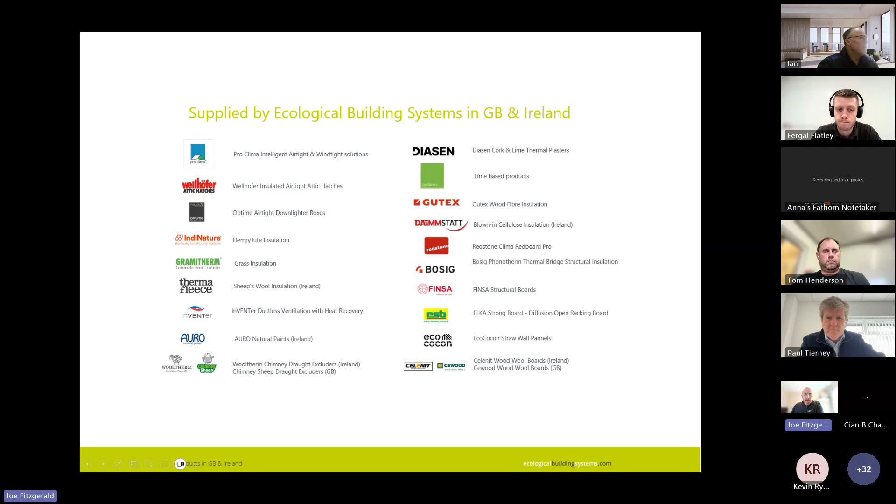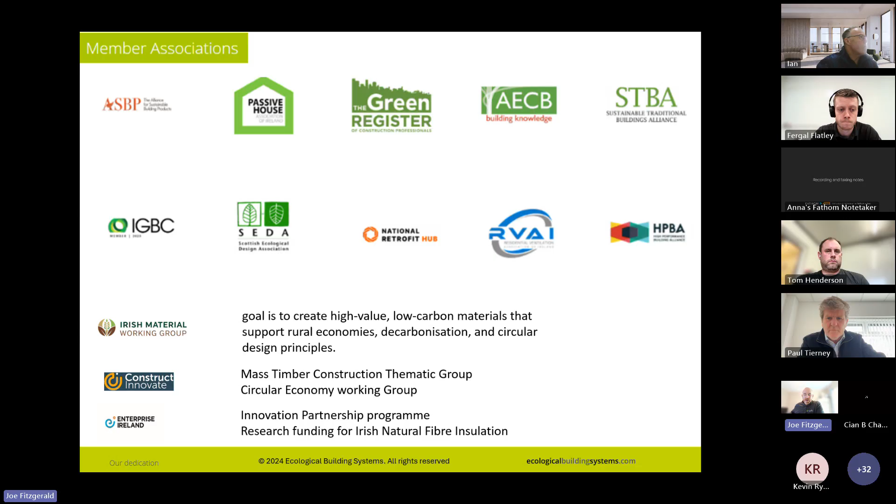Climate action is really driving the need for a change, and there's a growing need, as I said at the beginning, to address embodied carbon and other associated emissions in the built environment. So with that in mind, we have to think about what we're building from. And Ireland's climate action plan that I showed a moment ago is setting an ambitious target for us to achieve a 51% reduction in overall greenhouse gas emissions by 2030 and sets out a path to reach low carbon emissions by 2050. But timber is recognised as a key material that can help us meet these challenges.

So if we're going to build from timber, then it's also important that the insulations we use and the technologies that we're promoting are consistent with those types of principles. So architects and designers are going to more and more be required to specify low carbon construction methods and even low carbon cement material as far as practical moving forward. So you're seeing big shifts in the industry and a lot of changes in this area.

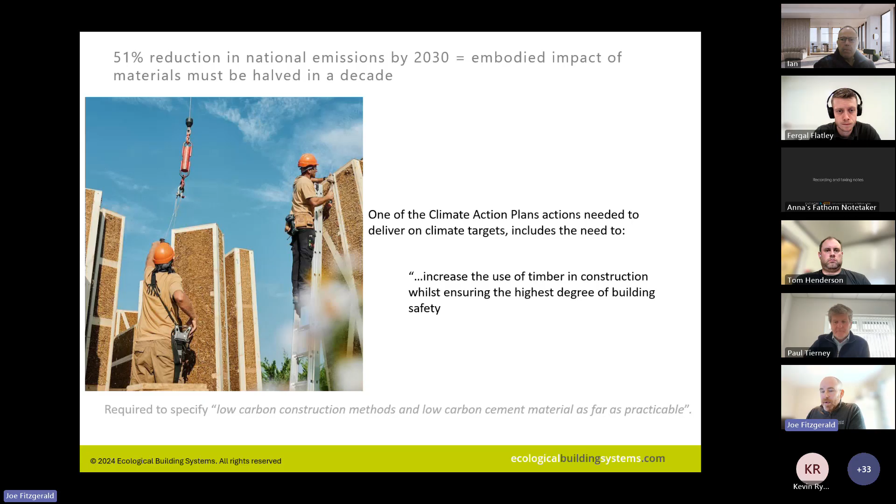We're also trying to move towards a more circular economy where we're reducing waste, and instead we're trying to promote the reuse of materials. But a big problem we have, if you take these figures taken directly from the IGBC, the Irish Green Building Council, they published a Circular Ireland roadmap last year, and this is one of the key statistics in the report, which you can download: 97% of materials flowing through the Irish economy are from virgin sources. So if that's the case, then we're not doing very well in terms of circularity or reusing materials. So if we have such a heavy amount of virgin material moving through the Irish economy, we have to carefully select the material that we're using in construction.

So we can do that by using EPDs, or environmental product declarations. It helps us to look at this virgin material. It helps us to determine what, if any, impact the material may have on our buildings. So most manufacturers now declare environmental performance of building products in this way. And as I said, they're not the silver bullet, but they can be used as a frame of reference for building life cycle assessments. Here's just a quick example for you.

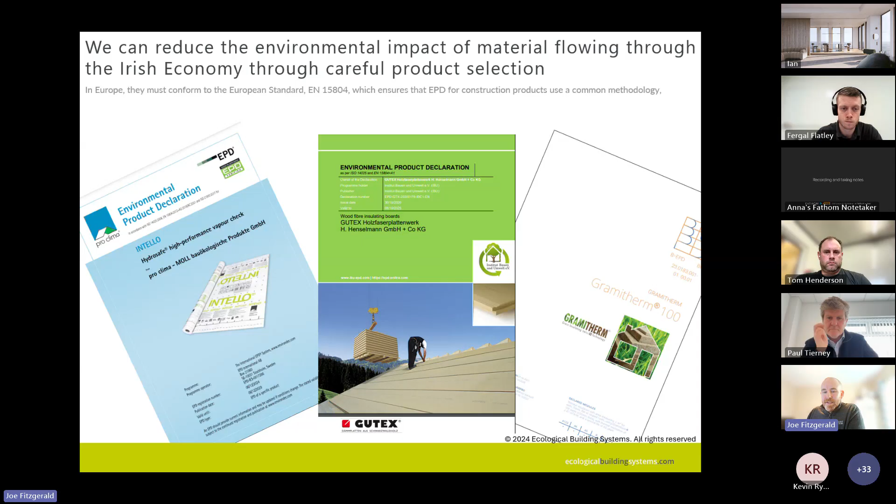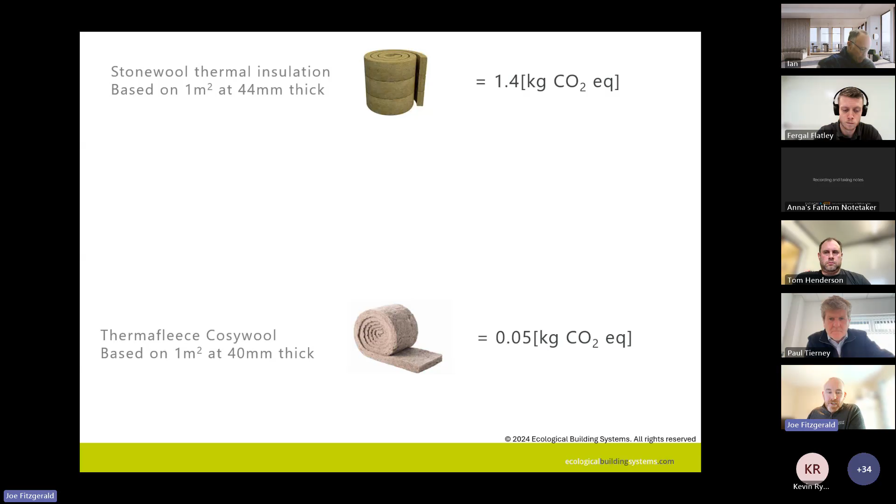If you take the EPDs for two products on the market, Thermafleece Cosywool supplied by Ecological Building Systems, compared with conventional stone wool thermal insulation that would give you a similar U value, the Cosywool, just by comparison of global warming potential alone, performs about 28 times better. So just on that basis alone, if you get the same U value but it has a lot less environmental impact, there's great cause there to be potentially using something that can benefit not only the agricultural sector, but also the environment, as well as building performance.

So it's not just about the materials you supply, but in Ecological Building Systems as well, we also try to promote low carbon construction techniques and technologies. EcoCocon, for example, would be a recent strategic partnership to try and promote low carbon construction at scale.

So if you take the construction technology in mind here, EcoCocon, which is a load-bearing twin-stud timber frame, it's just filled with compacted straw. It's not treated, it's just pressed really tightly. Then it goes into a big machine, it's lifted in by robots, and it gets a haircut. It gets a very nice, precise trim where you end up with a very consistent panel, very consistent U values, very consistent performance. It's 89% straw, 9% timber approximately, and the rest is about 2% fixings.

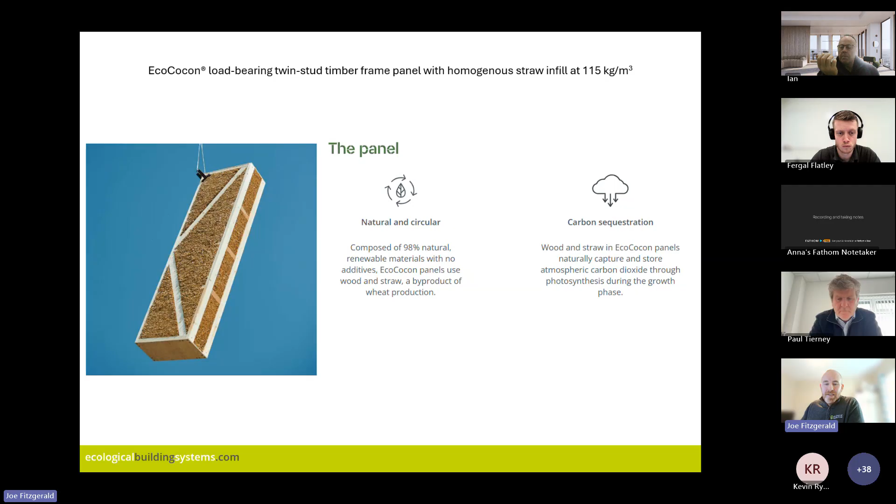So wood and straw in these panels naturally capture and store atmospheric carbon through photosynthesis during the growth phase. And a lot of insulations do this as well, things like wood fibre, hemp, jute, etc. You get a lot of carbon sequestering going on. So when you combine a low carbon construction technique like this with a low carbon insulation material, you get many of the advantages that we're trying to achieve for Ireland's Climate Action Plan.

You can take the same technology and apply it to a roof. Every building in the world has a timber frame sitting on top of it. So the roofs can be naturally insulated, enhancing the performance of the wooden technology that's already in place. Or you can go for something more ready-made, like the EcoCocon straw wall panel system, which comes with its insulation in it.

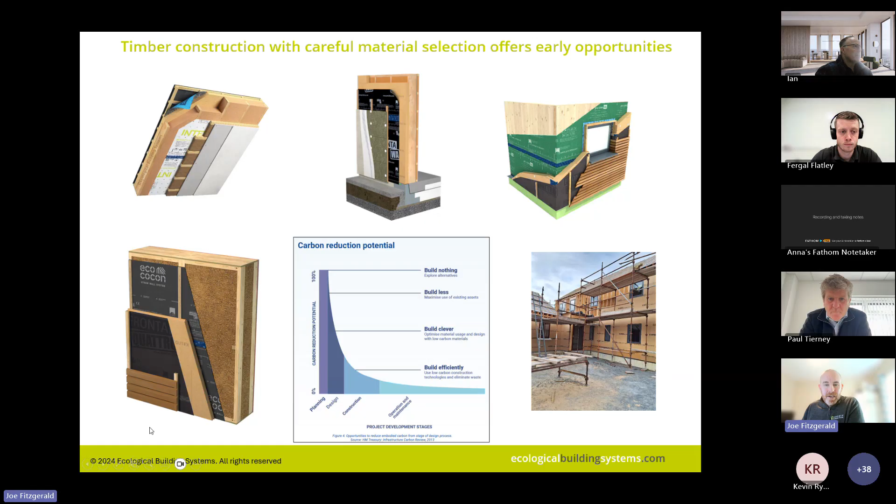And building cleverly is where we can make good design choices to affect carbon in the atmosphere, because the built environment is associated with about 39% of global emissions when it comes to climate pollution. So really, by carefully selecting what we build from, we have an opportunity to reduce this impact. So natural fibre insulation goes a long way to doing this. It doesn't need to be overly complicated.

Natural fibre insulations are made from organic materials like wood fibre, hemp, wool. The fibres are then mechanically processed. They're not chemically altered; they keep them as natural as possible. The amount of processing really just varies by the different types, as does the addition of different fibres and binders. A lot of them use recycled polyester binders, so it also promotes circular economies as well.

Most of these natural fibre insulations are sourced as byproducts from other processes. For example, the timber sawmill industry has a wood chip waste, and that wood chip is turned into wood fibres of varying densities, wood fibres for roofs, flexible wood fibres for rafters, blown wood fibres to blow into stud-works, and cellulose and things like that. So they all have low embodied impact, and a lot of the production takes place in the UK or Europe. So we supply a lot of these on the market in Ireland.

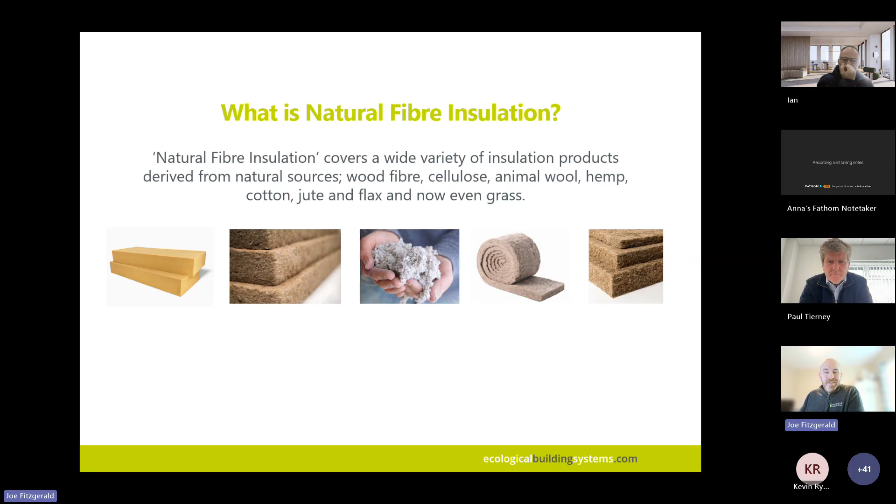We supply wood fibre, hemp, cellulose, wool, grass-based insulation, straw wall panel systems, and a lot of them share similar attributes. When you look at the attributes that they have, without reading the screen for you, they tend to perform in various ways, with the main things being how low embodied carbon they are, how circular they are by design, and how they manage and balance moisture in buildings.

They're really, really good at, well, breathing would be just a way of thinking about them, but they're very, very good at balancing excesses in humidity when required. So they're very friendly within timber construction. They suit timber construction very, very well. They're straightforward to install.

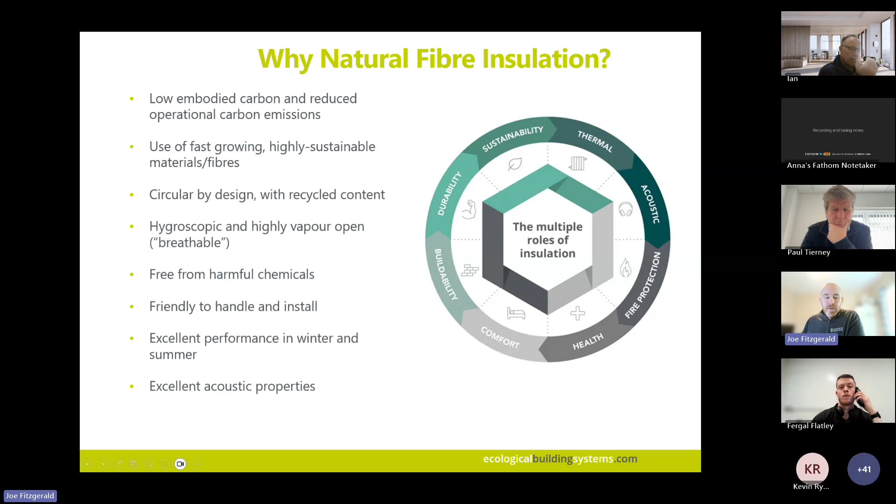They can be overcomplicated, but most ordinary people can install this type of insulation. You don't need specialist equipment or safety gear. They are a bit more expensive than the conventional alternatives, because while it's niche, it'll always be more expensive. But as the popularity grows, you should see the distance between the two of them closing significantly.

Over COVID, when chemicals were hard to get, when a lot of petrochemical-based insulation companies were struggling to get those ingredients that they need, the prices of those products were rising pretty much daily. Whereas the natural fibre products that were being grown in the ground throughout Europe, the prices were more or less consistent across Europe, and they were only being affected by transport costs, really, but overall the costs were much more stable. So if you're using a natural fibre insulation like this, you can see what its advantages are.

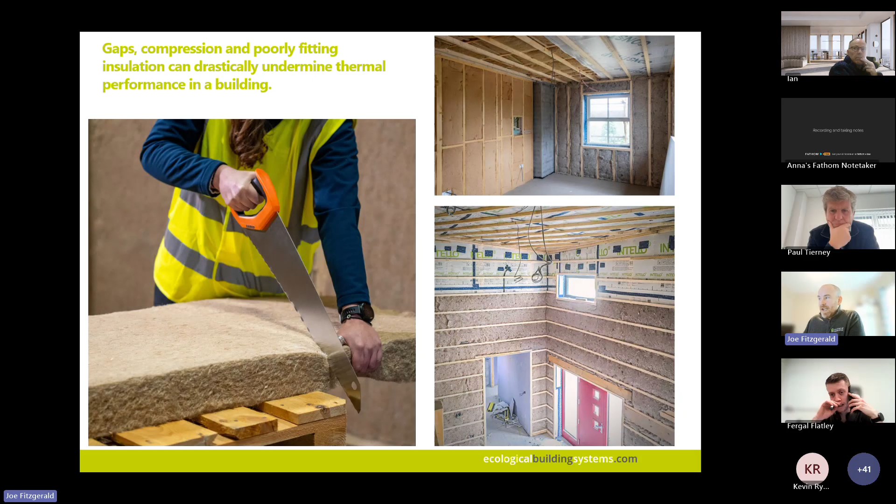Irregular stud spacings and site tolerances kind of make it difficult to use boards and stuff like that. Whereas flexible insulators like these, just to take, for example, Gutex Thermoflex, they're designed to friction fit into these spaces, allowing it to adapt around framing and surfaces, maintaining close contact with the frame itself. They're really easy to press into things, in other words.

Just to give you an idea of what they're good at in a quick snapshot, because we only have an hour to get through quite a lot of context. Here's a good report that's independent from Ecological Building Systems. It's from the Alliance for Sustainable Building Products, produced in 2025. And it's a really good read. It's a good guide and explains many of the terms we're using today.

The first column in the table, the one underneath the natural fibre heading, obviously belongs to natural fibre, and it shows mostly green boxes, indicating a high benefit in each case with a few exceptions. So natural fibre insulations tend to have a lot of benefits when compared to conventional insulations. If you look at it versus mineral fibre alone, there's nothing wrong with mineral fibre, but if you just want to look at its benefits, you could say it has much more thermal mass than mineral fibre. It has a much better ability to buffer and safely store humidity. It's much more renewable and it's less likely to impact your air quality. So its benefits are much more wide-ranging.

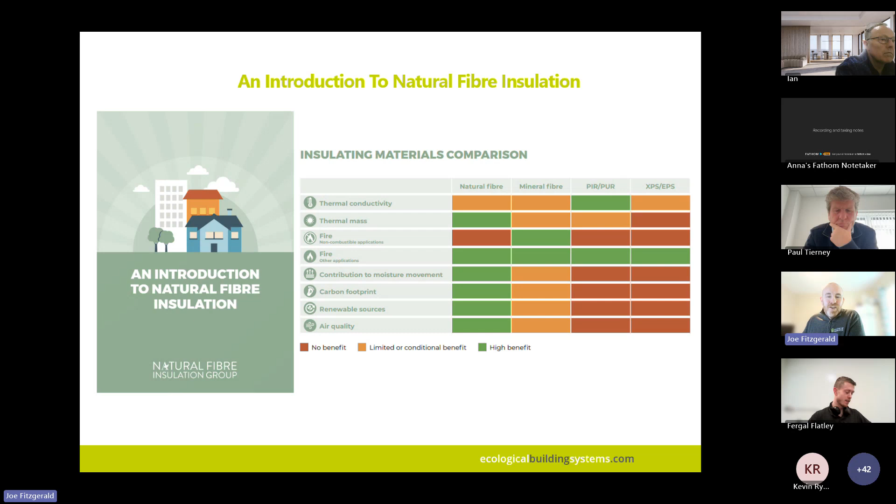And then if you look across the board at all the natural fibre products, they have different things in common. I'll just take a couple and showcase it just to prove it. If I look at Gramitherm, one of our latest partnerships, apologies for the pie chart, there is a colour there that's misleading. The orange section should be purple on that pie chart.

But just to give you an idea, it's primarily produced from grass. The grass is taken from parks, canals, grass verges. It's not cultivated grass. So this grass is really respectful to biodiversity. It's grass that's mowed by city councils and things like that. And even the mowing height and times are really carefully planned.

So then the dry grass is combined with recycled jute fibres. You see the dried grass there on the left, and you see the recycled jute fibres arriving in the big sacks and a handful of it there. And by incorporating renewable grass fibres and recycled jute, that's supporting a circular economy as well, because it's taking that jute waste, like cocoa bags and things like that.

So the grass is no longer a food source because the digestible liquid component of the raw grass has been removed during the production. So rodents wouldn't be able to digest the cellulose. And that's also true for straw as well. Once the wheat is gone, once the food source is gone from it, it's just basically mini trees, it's little sticks. So they no longer have an interest in consuming the product.

So just some figures from the EPD of this product. The natural grass fibre, cleaned without any nutrients, is about 70% to 75% of the mix. The jute fibres, from the recycling of jute bags containing cocoa beans and things like that, are about 20 to 25% of the mix. And then there's a low melt recycled polyester fibre. That's just completely recycled polyester content. That's used as a binder to help bind it all together and keep it consistent.

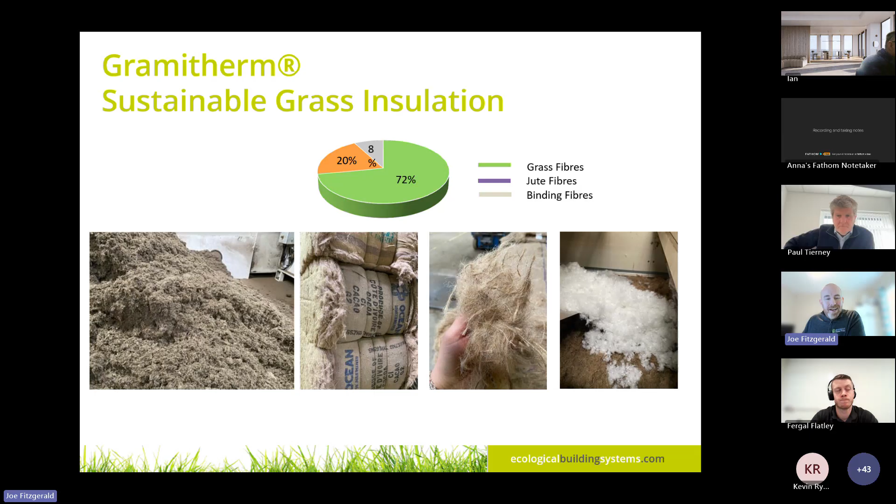And then they use a baking soda salt mix for flame retardant. So that's added to a lot of natural fiber products as well. So it'll give you an idea of one of the natural fiber products. And then what it's good at is generally consistent across all the natural fiber range.

So if you look at what these things are really good at, here's just a graph taken from one of the tests that was conducted. So the test standard in this case, if anyone wants to know that information, is EN12571. But there are various other tests conducted as well, that's just one of them. This would just be a snapshot of its capability at varying humidities.

So if you move from left to right on the x-axis, you can see that as the humidity gets higher and higher, maybe that's inside a construction, that could be 100 mil deep into a 220 mil stud. As the humidity gets higher relative to the temperature inside the space, the product is able to absorb more and more of that humidity. It has really strong hygroscopic properties, which is great at balancing excesses in moisture.

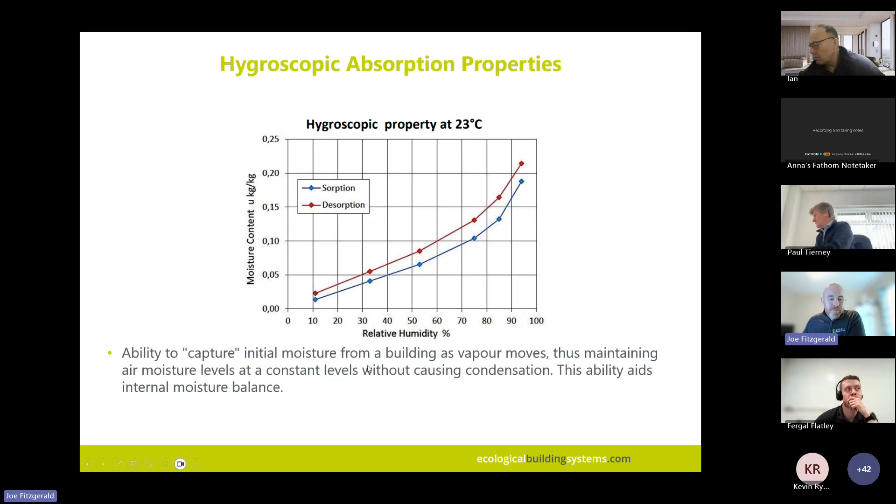It's also very good at desorbing. So while it can absorb that excess in humidity, safely buffering it, other things that are well known for that would be wood fibre and cellulose and so on. It's also great at desorbing as well. So when conditions allow, when drying is more favourable in various directions, it's very good at releasing it too. It doesn't hold on to it. It's not a permanent storage. So a lot of natural fibre insulations are really good at that, and they do so without any harmful emissions. So there's no off-gassing when it comes to these natural products.

While there aren't any national guidelines for volatile organic compounds, there are some standards out there that people point to, like WELL. And WELL is a performance-based system for measuring the impact of the built environment on health and well-being of people. So many people will use WELL as a kind of, well, here's what WELL says.

Okay, so many building materials are known to off-gas VOCs, like polyurethane-based products tend to off-gas, depending on how they're made. A lot of them use blowing agents during production. And those blowing agents can be released slowly over time, and can add compounds to the air we're breathing.

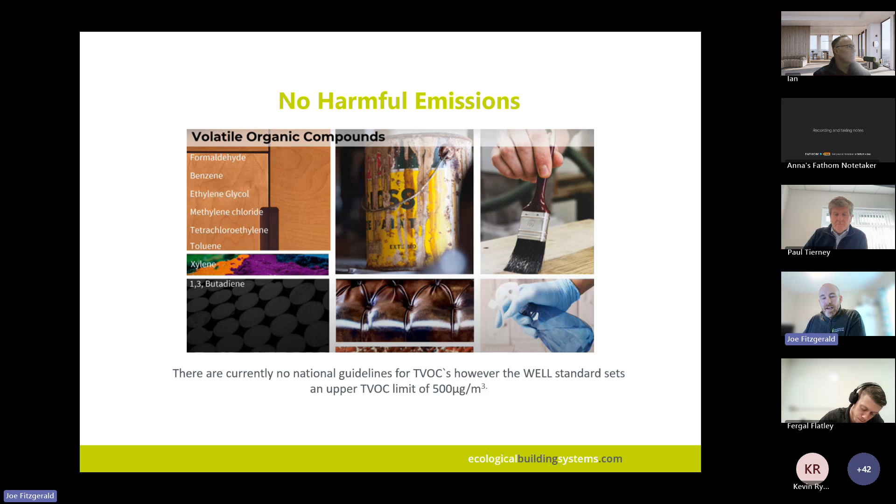But if you use the WELL guidelines, and if you say that 500 micrograms per meter cubed is a safe threshold not to exceed, so they suggest that a healthy material would be a value lower than 500 micrograms per meter cubed, then just look at the emissions coming off something like a natural fibre insulation, and you can cross-reference that and see that after 28 days, 17 micrograms per meter cubed were measured. So 500 was a safe level. And if this test report gives you an A+ for having less than 1,000, well, then 17 is surely a safe value. So this ensures that if you're using natural fibre insulations, you end up with healthier indoor air quality.

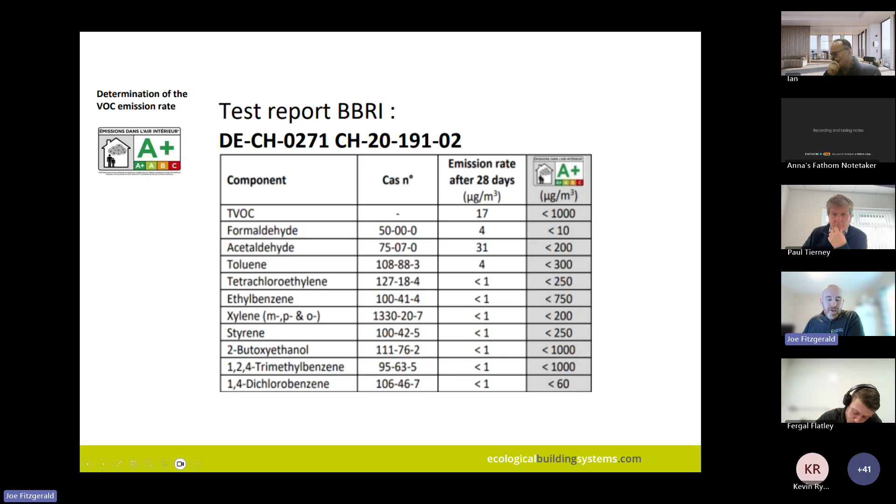It's like having good water quality. We all want to be breathing clean air, just in the same way as we want to be drinking clean water. So it's hard to see it, but making sure we surround ourselves with non-harmful products and materials will make sure we're not making conditions like asthma any worse. So the indoor environment benefits greatly from selecting products like these.

Then on a technical capacity in buildings, of course, these things are very important as well. So it's great at absorbing sound. You could take any natural fibre product, you could put it into intermediate floor spaces or separating walls between bedrooms or whatever, and its ability to dampen acoustic noise, or just to absorb noise energy, is very well known.

So you can see here by this graph taken from its technical details that if you run down the little graph on the side, at a frequency of 1,000 hertz, its noise absorption coefficient is 0.99, which is 99% of the sound energy hitting it.

So it's capable of absorbing all that sound because, similar to wood fibre and other natural insulation products, it has great dynamic stiffness. It's very flexible, yet it's kind of semi-rigid. It has a lot of texture and surface area. It's brilliant at absorbing noise. It's a great buffer to absorb noise.

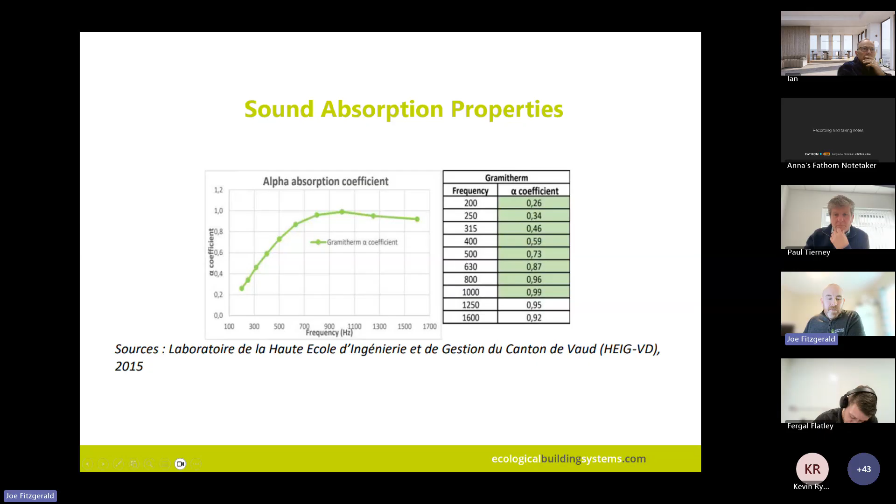And we actually have a sound test in Ecological Building Systems where we have 3 various boxes made up of different insulation types: stone wool, XPS, wood fibre. And we have a speaker inside all 3 of them. And you can turn up the noise based on whatever music you want to play, and the wood fibre really deadens the noise. It really, really absorbs that energy, whereas the other 2 may as well not be there. It just floats through it. So these are some of the natural advantages that a natural fibre insulation product can offer.

And again, as I said, I could take a look at a different product, for example, IndiBreathe Flex, which is a hemp and jute product that we're supplying currently. And I can just look at its constituents and its makeup and its density and its thermal conductivity, and I get a very similar outcome. So it nearly becomes a situation of, what do you prefer the most? Is it grass? Is it hemp? What's your preference?

Because natural fibre insulation, it's kind of hard to pick a favourite. My personal favourite is the sheep wool. I like the sheep wool myself, but I'd be very happy to be surrounded by all of it. None of it minds. And again, just in the same way that the others have salt added to it for fire protection, this one also has a 1% sodium carbonate added as well. So there's a lot of similarities between these various products.

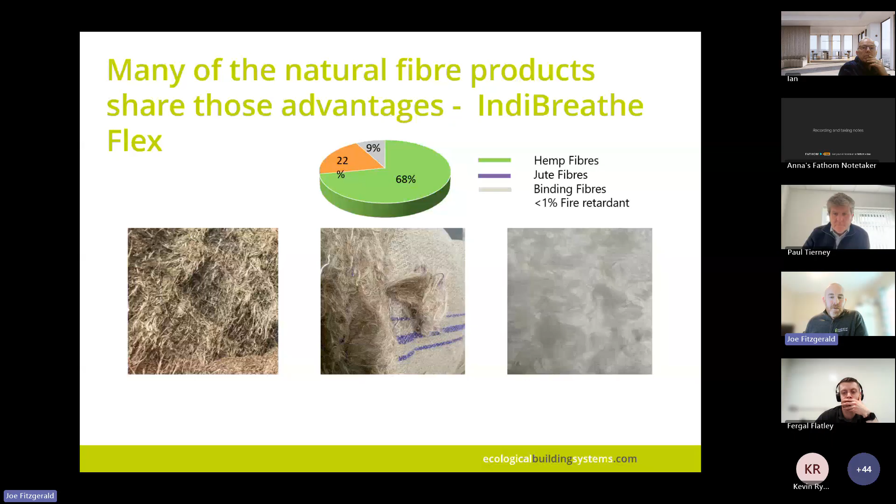And then their thermal conductivity is pretty similar as well. There is a range. I mean, there may be 10% difference from one to the other overall, but just take, for example, how they perform in construction, because U values are important. Thermal performance, over the next few slides, you'll just see that there's a similarity between them all as well.

If I take a passive eco wall frame, so if I get a timber stud spaced at 600 mil centres and I blow in wood fibre into the stud, and then if I clad it with 60mm wood fibre board on the outside and create a rear ventilated facade, I get a U value of 0.12. That's with the inclusion of a 40mm insulated service cavity inside. And all of that frame is all blown wood fibre, flexible wood fibre, and dense wood fibre. So 0.12 is very achievable with a relatively conventional frame size, 220mm frame. So that's passive standard of performance with natural insulations in a cleverly designed way.

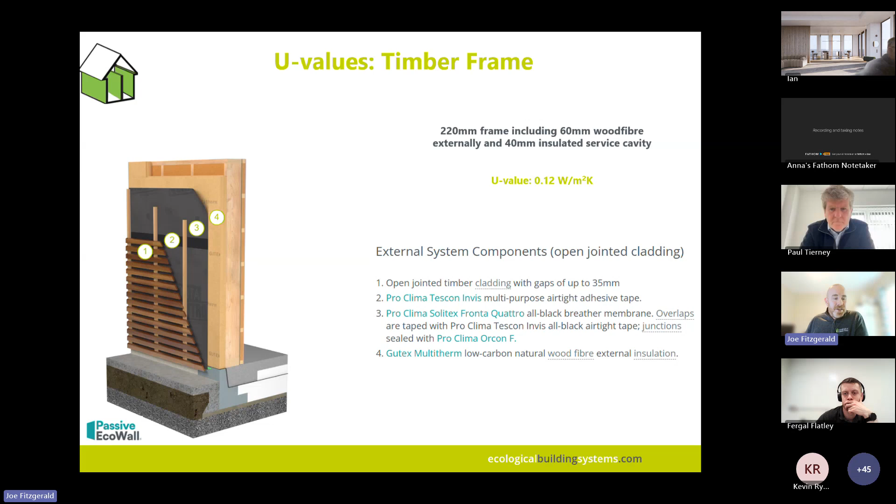If I take the Eco-Cocoon straw wall panel system, depending on the straw wall panel that you use, I can take a 300mm panel and add 60mm of Gutex to it, and I get a U value of 0.15. Or I can take a 400mm panel and add 60mm of Gutex to it and get down to 0.12. So the values and the performance are very, very similar. This just happens to be a pre-insulated timber frame packed with straw.

So you can see that natural insulators share a lot of similarities overall, especially how you build and how you use them as well. And then if I take it away from a wall and I stick it on a roof instead, the same principles apply. Really, the size of the rafter will dictate most of the U value because that's where the best insulator will go. So if you've got a rafter of 220 versus a rafter of 140, you'll see there's a big jump in U value performance because most of the insulation is going into that space.

But overall, these natural insulators can do pretty much anything that conventional insulators can do as well. They'll never perform to the same thermal quality alone, if you're looking through that lens only, as something like PIR, for example, because that's just a U value race. But if you're looking at it in terms of thermal mass or moisture balancing ability or anything like that, or carbon, then the natural fibre insulators will leave that in the dust.

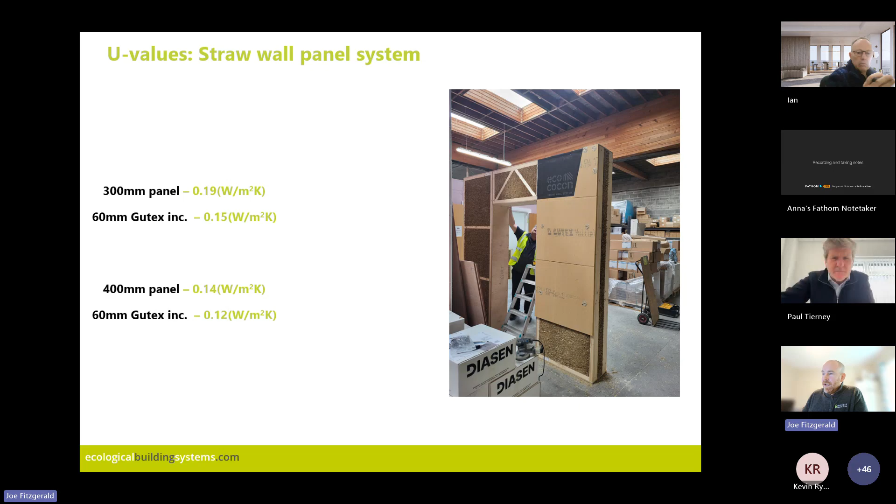It's used to prevent thermal bridging. So if you look at the bottom left-hand image there, you'll see each one of those rafters would be filled with insulation. But without a wood fibre layer on the outside of those rafters, the insulation might as well not be there, because all that heat is just going to conduct through that rafter, being the more conductive material.

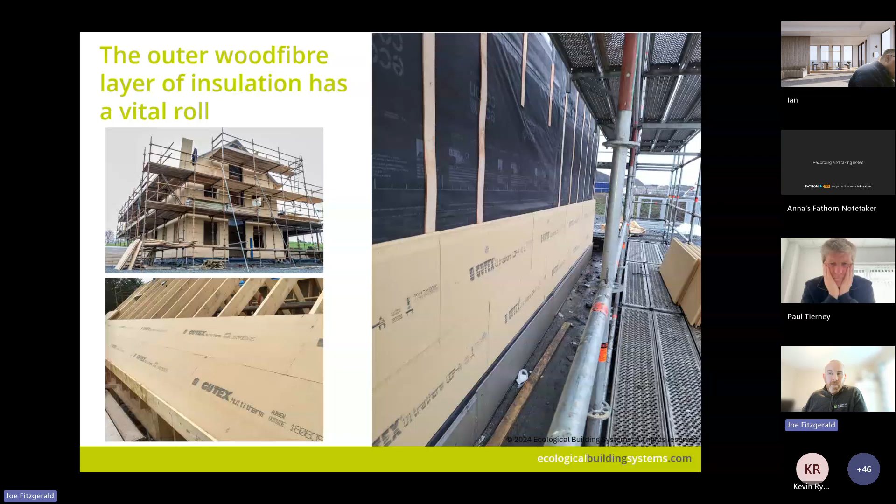It's a separation in the insulation line, you see. So it doesn't matter how much insulation you've got in the rafter, if you're allowing the energy out through the rafter itself, you'll have a lot of thermal bridging to contend with. So wood fibre is brilliant at preventing that, where thermal bridging is very frequent. And in timber frame construction, thermal bridging is very frequent.

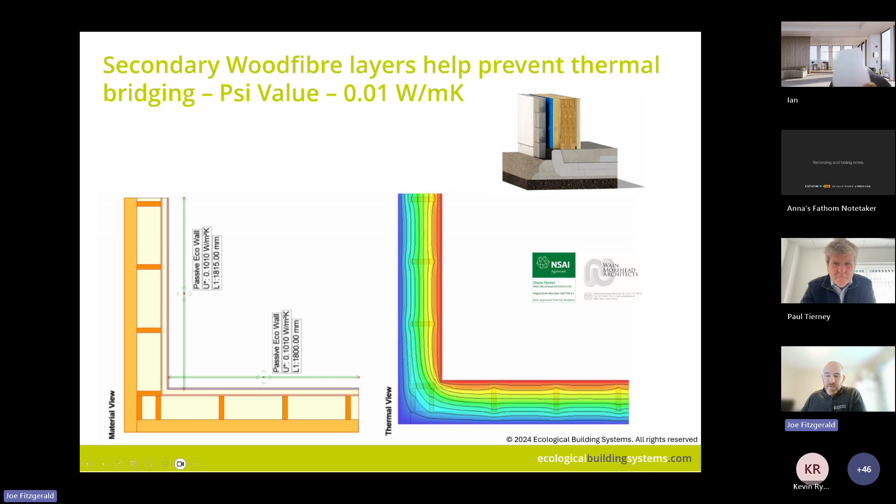So this is where the secondary layers of insulation, especially in the natural fibre context, wood fibre plays a vital role in actual performance. And when it comes to performance, the structure of the building is always at odds with the thermal performance of the building. Because Andrew Lumberg once told me it's important, apparently, for buildings to stand up. And I would agree with him on that. So if you allow these structural interruptions to simply go through your main insulation layer without resolving them, you'll end up with a lot of thermal bridging across your building.

So this is just one small section of a 3D thermal detail that I carried out. It has cellulose between a stud frame and it has wood fibre on the outside of the frame. The main structural interruptions would be the stud itself, the cripple studs holding up the steel I-beam, and the steel I-beam itself, which is going through the main insulation layer.

All of those thermal bridges are passing straight through the majority of the U value. So that grey block, that's doing all of the U value heavy lifting. But that's also where all the thermal bridges are. So while the wood fibre layer on the outside does improve your U value slightly, it's actually designed just to stop that thermal bridging. A secondary insulation layer can do that better than anything else.

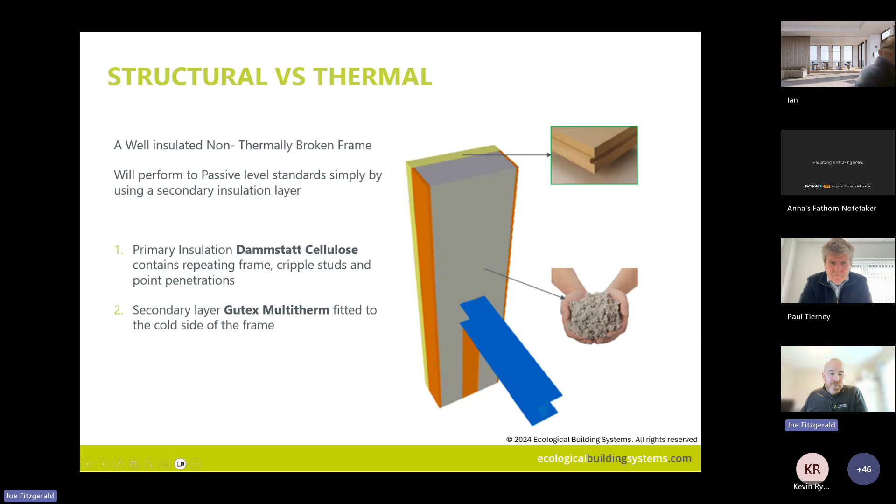So if I press run on a model, when I have wood fibre on the outside, I get a nice, consistent, cool outer surface. No heat loss is apparent coming through that detail. I can't remember the figure off the top of my head, but something like 11% of the energy lost in that detail overall is associated with the thermal bridging.

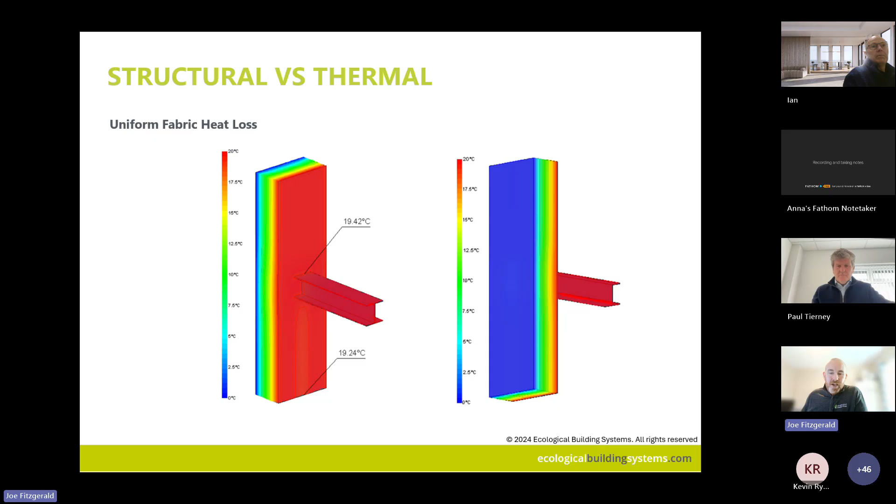But if I take the wood fibre off and replace it with OSB, if I just say this is a normal frame from the 1990s, and I rerun my model, I don't get a consistent blue line anymore. Now I can see where the energy is being lost. I can see the studs, I can see the cripple studs, and I can really see the point thermal bridge in terms of the steel I-beam.

So this clearly demonstrates a more uneven distribution of fabric heat loss. The losses are more focused on those interruptions from the structural necessity. So the wood fibre helps prevent that. And I think the overall heat loss associated with that I-beam alone jumps by a factor of 3, just because I removed the wood fibre layer. So it really allows energy to get out of your building.

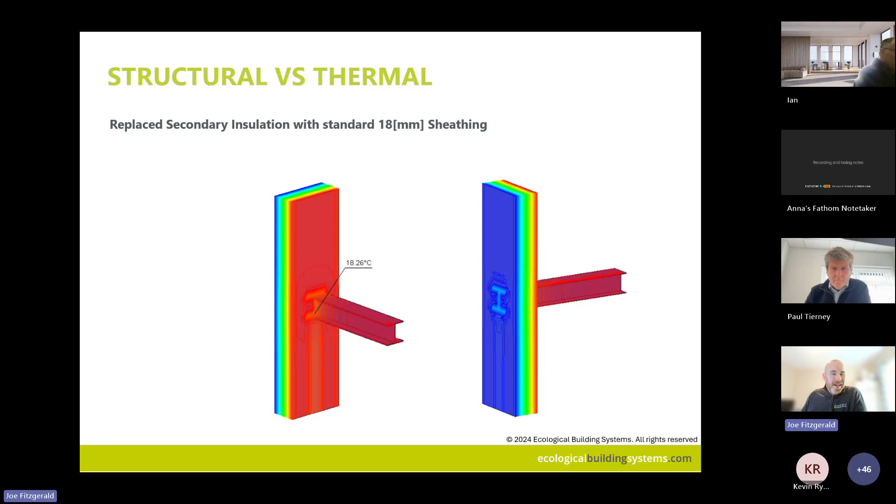This is where low energy modern buildings sometimes don't quite perform as well as you expect them to. That can be down to thermal bridging or sometimes air tightness. So wood fibres and natural fibre insulations belong in the highest performing buildings, is I guess the theme of these few slides. When you build this way, you end up with a very structurally sound, warm building. And then, of course, we've got to look at the carbon, just to circle back to the purpose of today's presentation.

We're going to just look at some target values just to give some figures and context for it. But if we want to look at true zero energy buildings, we need to go beyond operational performance. We know that we should all be building A-rated buildings. But even to add to that, I think most people know now that passive is probably the building principle to aim for. Anything less than that is probably less performance.

We know that we want to get the buildings as low energy as possible, so we won't look at operational energy. But we will look at embodied carbon. For dwellings, they set a target value of 625, and for schools, they set a target value of 540. So I'm going to show you a school and a dwelling. They're built with natural fibre insulations, and we'll reference how well they've done against those two values.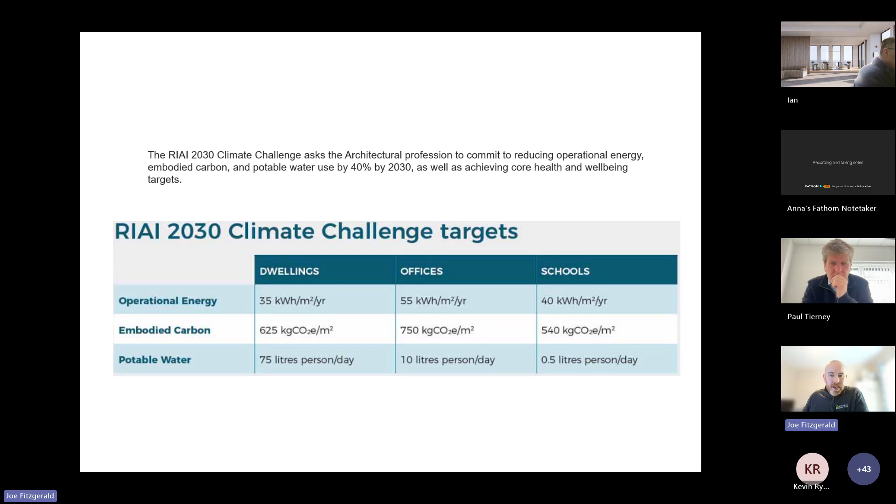So the first one is one of Lidan Designs' early projects. They're a well-known company in this space, and they gained a reputation for building low-carbon, high-performance buildings. This is one of their early projects, and they started small. It was 200 square meters. It featured in Passive House Plus magazine. They had some carbon assessments done, and they smashed their targets out of the water. They beat those targets for new schools by approximately 54%.

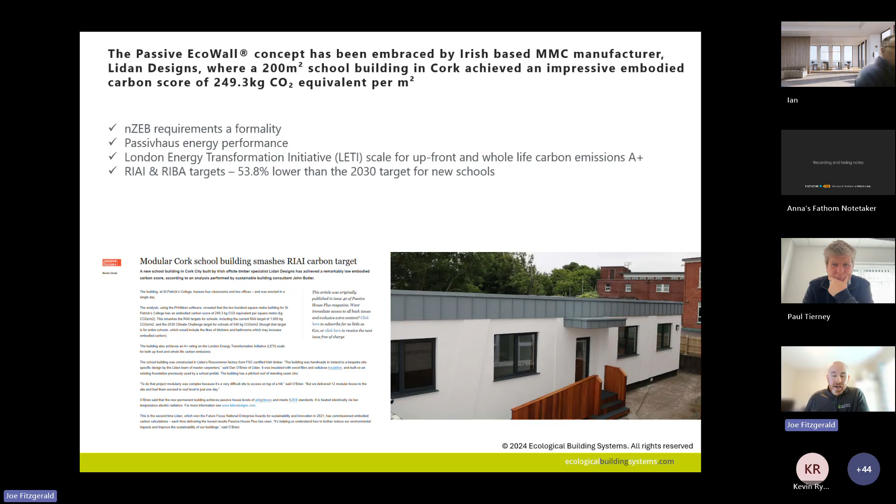They built this school, by the way, from timber frame studs. They had a Medite OSB airtight board on the inside, taped up for airtightness. The frame was filled with cellulose, and the outside of the frame used a wood fibre board before it was clad with a rear ventilated facade. So that's how they smashed their targets. They built to passive principles, so their operational performance is very good. But because it worked, they scaled it up by a factor of 5, and they did it again.

So they created a 1,000 square meter project this time in Offaly. The value they achieved when they had an independent carbon assessment done was 488.2 kilos of CO2 equivalent per meter squared, comfortably beating that 2030 Climate Challenge target for schools. When they looked at this more carefully with an independent assessor, they found that a third of their emissions came from the concrete foundation, which they had nothing to do with. It was outside of their scope.

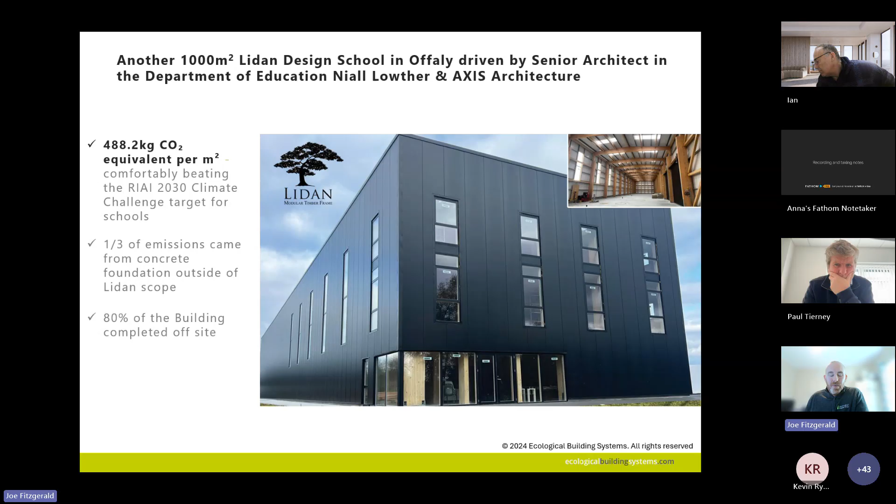So these are some of the figures from that independent assessment by John Butler, who is a well-known whole life carbon consultant. They found that while the as-built performed very, very well, if you look at the bar chart in the center, the as-built without the foundations would have had a massive reduction, maybe 3 times less carbon overall. So some of these design choices are out of your hands, but you can really have a big impact with some of the obvious low-hanging fruit: carbon in concrete, carbon in steel, things like that.

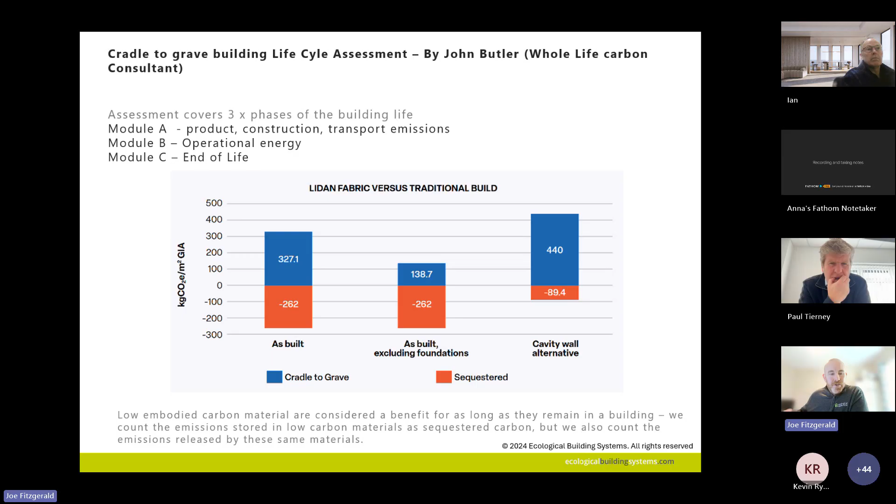Because they built the way they did, they more or less assured that they would beat their targets, but they can always do better. Maybe in this case, if they were given an A, they could have been given an A plus or an A plus plus from reducing the amount of concrete in the building.

And the same can be true for dwellings. Now, the standard for dwellings is a bit easier; the values that are put in for dwellings are a little bit higher. But if we look at my boss's house, Niall Crossan, for the domestic context, he built a naturally insulated timber frame to the Passive House standard.

And just through careful material selection and good design, really, that's all he needed to do to hit the ZEB standard, or the NZEB standard at the time. He was guaranteed to get his A rating, but especially working in this industry for so long and being so well known, he wanted to make sure that he did it in as environmentally friendly a way

as possible. So he built a timber frame, and he used blown wood fibre called Gutex Thermofibre into a 220 frame, and he used 50 mil of Thermafleece CosyWool as an insulation for a service cavity behind his plasterboard. And on the outside of his frame, I think he used a 60 mil wood fibreboard before building various types of rear ventilated facades on his building. So that'll give you an idea of how he built his house, right?

But just to get an idea of how his house performed, we didn't look at his U values, which were outstanding, or his windows, which were as high performance as the market has, or his heating system, which is state of the art, or his insulated foundation type. We didn't look at any of that. We just looked at air tightness in his home, right?

So from an operational point of view, it was recognized very early on that the predicted heating cost was really influenced by air tightness. Because if you've got a heat pump designed to heat a volume of air in a home, and that home can't contain that air, then it's going to be heating more and more air. So depending on how many air changes it needs per hour, it's going to need more and more air. This is where heat pumps get a bad reputation from.

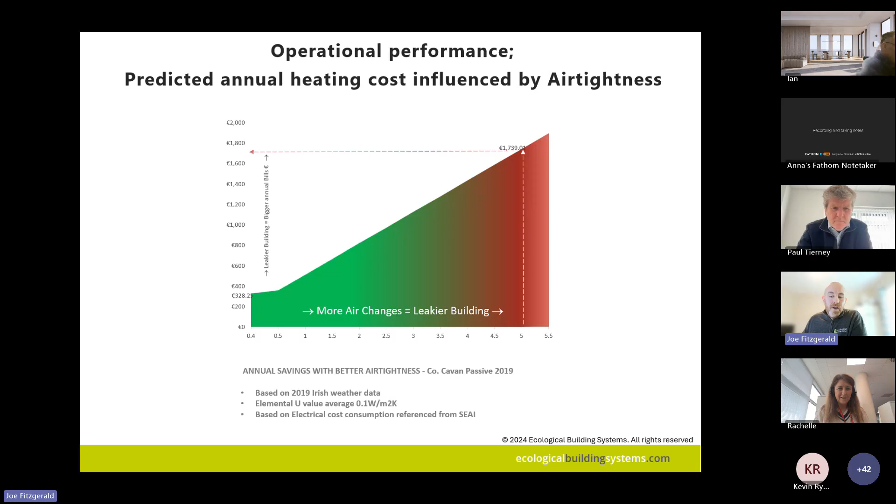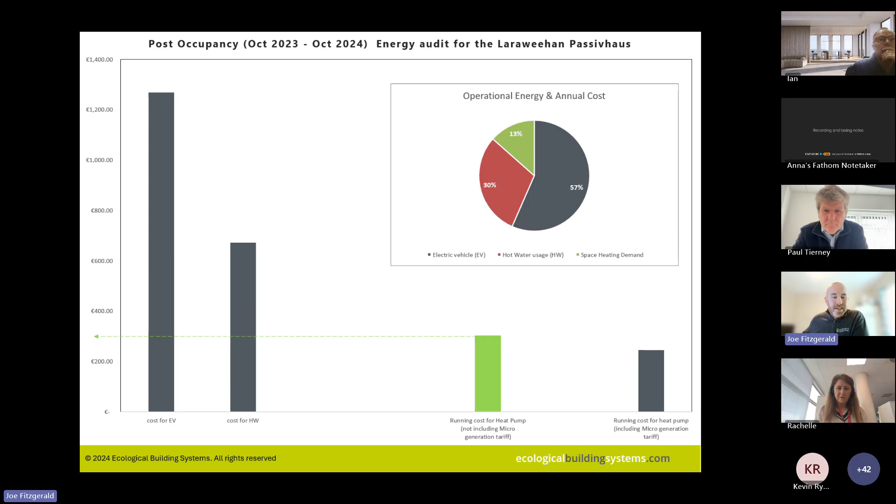What we found was that when we actually analysed Niall's bills at the end of 2024, the heating cost, which was predicted at €328, we were 8% off compared with his actual bills. His actual bills were €302, so they were slightly less. So the performance gap was tiny in Niall's house, based on predicted pre-construction costs, good design detailing, good U values, etc., versus what he's actually spent to date to run his heating system. So just good design and following passive principles can lead to this tiny performance gap.

And then I suppose there's nothing like lived experience to prove the concept as well. During the 2025 winter power outage, when a lot of the country had no energy for long periods of time, Niall's house kept a very steady temperature of 19 degrees. So it was clear it could hold that energy. He was able to walk around in the house for, I think, over 2 weeks with consistent, nice, warm temperatures just from good solar gain during that period, around 19 degrees.

I know my house certainly wasn't like that anyway.

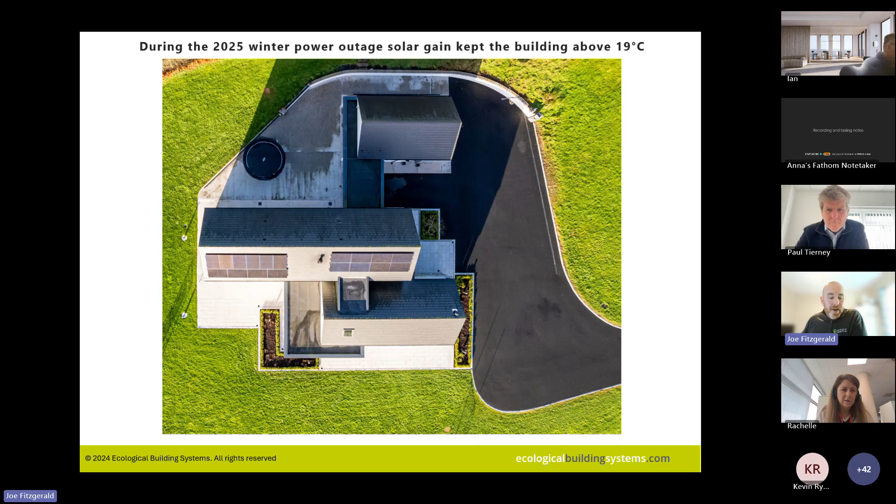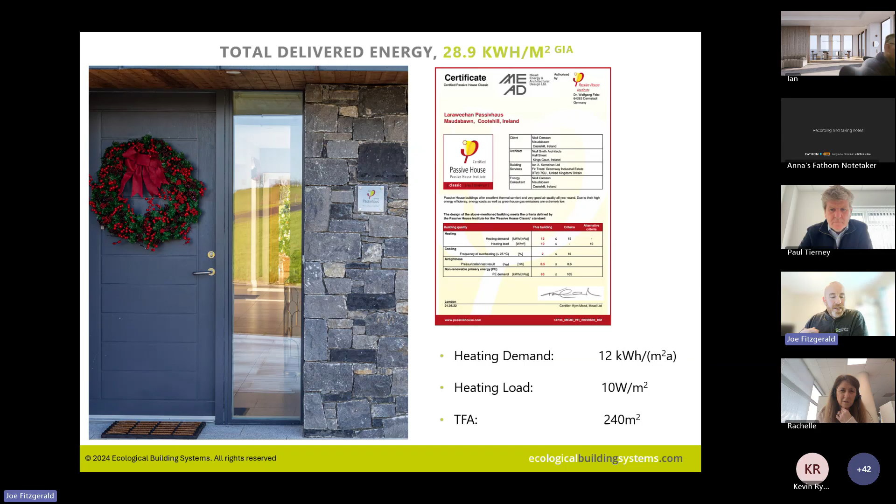So when it comes to operational performance, it was no problem. Just good design detailing, good air tightness, good window selection, good U values. But that didn't mention anything about the type of insulation that was used. We just know it was a good U value. It could have been a good U value based on mineral wool or PIR or whatever. And the good design detailing would get you that low operational performance, and you'd end up smashing the targets. But what about the embodied carbon performance of your building?

So this is the other half of the puzzle. This is the blind spot of the construction industry if you're not addressing it. In Niall's house, he had his assessment, and again, our friends in Wain Morehead, the architects, carried out the assessment for Niall and gave Niall an A rating for his home based on an upfront carbon total of 288 kilo of CO2 equivalent per metre squared. So that's nearly 3 times less than the target set out by the RIAI.

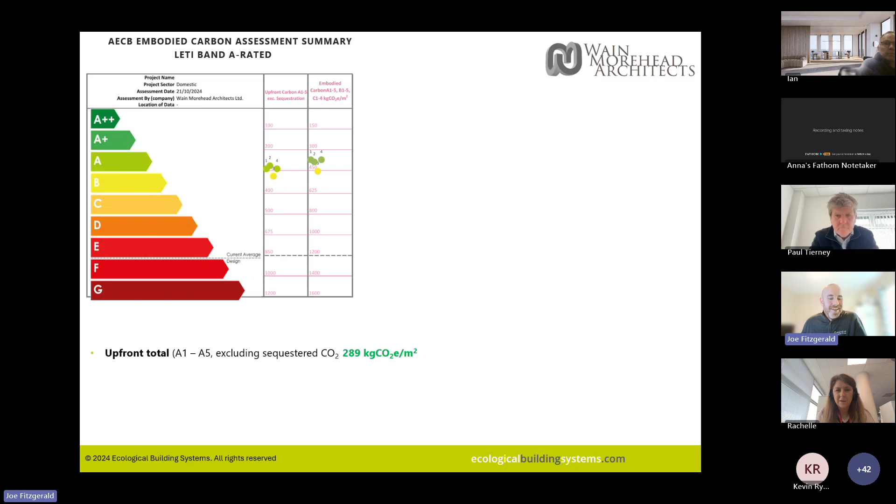Okay, so I mentioned at the start, he just done it with blown wood fibre, a timber frame, wood fibre used on the outside of the frame, and sheep wool. Okay, so he smashed his operational targets just by good detailing, but the careful selection of material gave him an A rating and helped him smash his embodied targets. But just like the Light and Design School, you can always do a bit better. You can always push it a bit harder and move it up that ladder to A plus or A plus plus. And how would you do that?

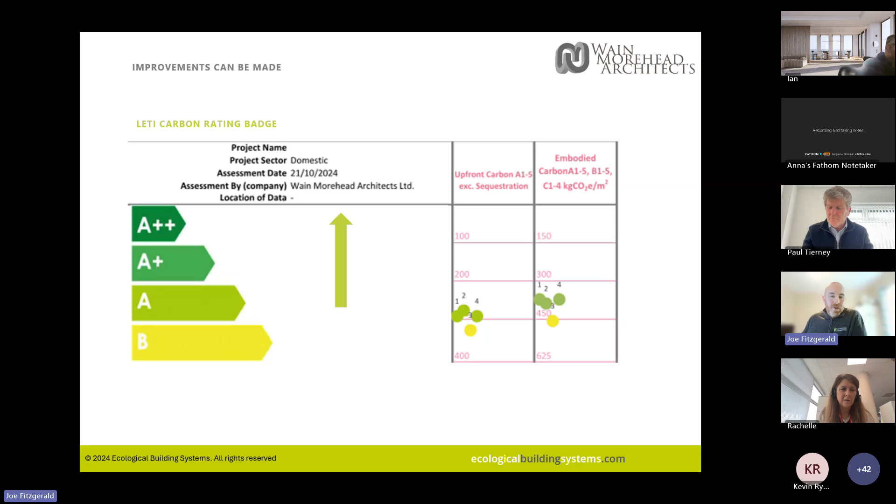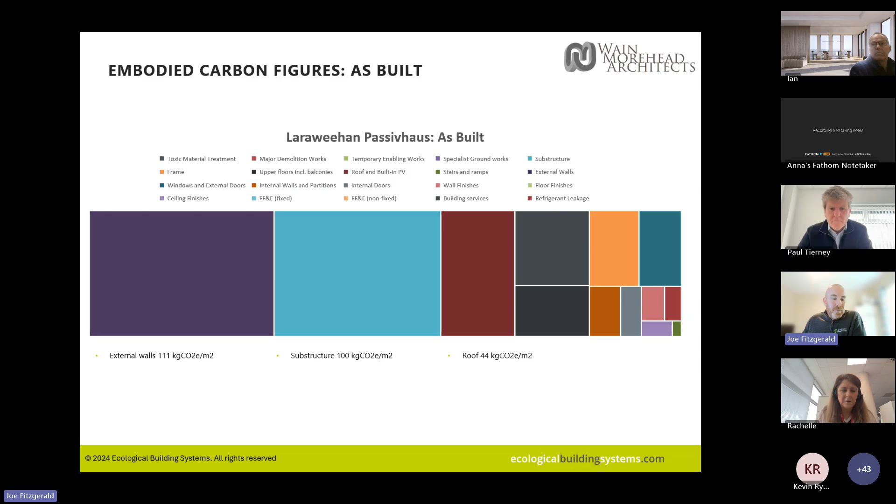Well, you look at embodied carbon figures and you find out where there is space to improve. So if you look at Niall's house, for example, the external walls made up a disproportionate carbon. The substructure, which is foundation, made up an equal amount of carbon. The roof made up this amount of carbon, okay? But if Niall wanted to do better and move it up the ladder a little bit, the walls aren't going to change. He's got them about as well as he can get them, okay, for now. If he used GGBS in lieu of concrete, he could dramatically reduce the amount of carbon associated with the concrete in the building. And then the roof is not going to change. He's still doing a good job on the roof.

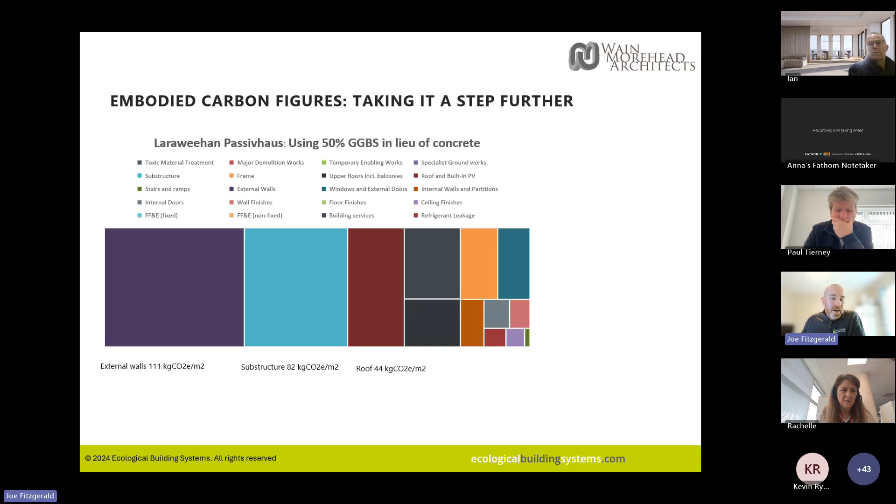Likewise, he could do something with the walls. If the substructure was GGBS, and instead of blockwork on the outside, he used a rendered cement board, he can reduce the amount of carbon in the walls dramatically. So his walls were actually performing pretty good, but he could have performed even better if he didn't use blockwork as an outer leaf, but there was some local planning restrictions in place. So really, the natural fibre insulations are the only things he's not having to change. He's changing things like concrete and blockwork. He's not going near the frame. He's not going near the wood fibre. The roof stays exactly the same, insulated with wood fibre.

So you can really see that the impact to get it from that A to A plus plus is really about looking at the massive materials in the building, the concretes, the blockworks, things like that, which would be the equivalent of 6 years operational energy in Niall's house as a saving, or driving in his electric car 185,000 kilometers.